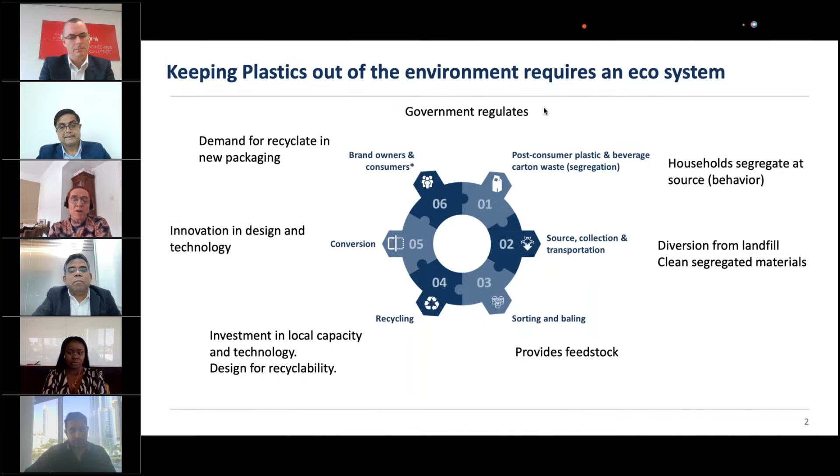So this is an ecosystem, and as you can see, it all starts with government regulation and enablers, which are absolutely crucial to keep plastics out of the environment. If we go to the next slide, please, Ben.

You'll see here, this is the landscape—specifically for the UAE, but I'll give you some input on the rest of the GCC as well. First of all, for a relatively small country, we generate quite a bit of waste. The majority is construction, demolition, and industrial waste, but we have about 6.5 million metric tons of municipal solid waste, and around 16% of that, about 1 million metric tons, is plastic materials.

Looking at that plastic component, by far the largest is LDPE, including flexibles, with a much smaller proportion of high density polyethylene, PP, and PET. Our per capita per day waste generation is about 68% higher than the global average—a GCC resident generates about 1.2 to 1.3 kilos of municipal solid waste per day versus a global average of about 0.74 kilos. So in general, we generate a huge amount of waste.

The plastic component of that waste can differ by country. In Bahrain, for example, it's estimated that almost 36% of what goes into municipal solid waste and into landfill is actually plastic—so quite a high generation, and a lot of secondary material available for recycling and conversion.

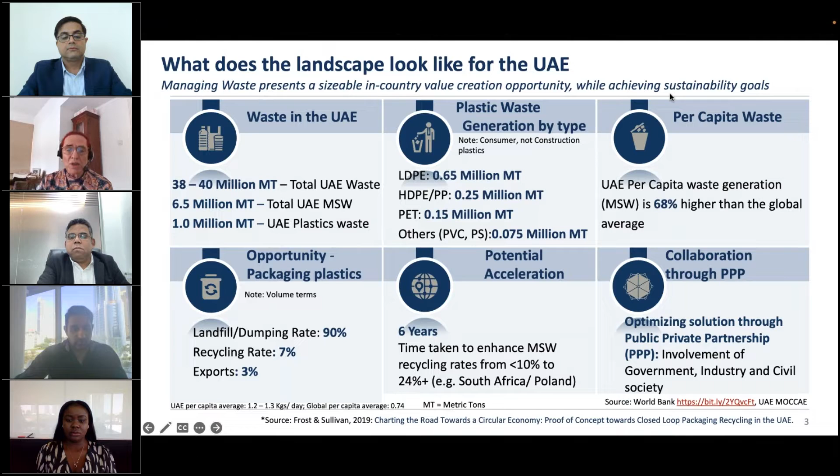Going to the next slide, one of the things undertaken was a proof of concept pilot in Abu Dhabi, where material was collected from private, clean segregated sources, as well as material from landfill. This was processed through a recycling facility in Al Ain. Then, through the operation of Industrium, our partners in the study, they did a plastic conversion. Using that material, they produced plastic pallets for logistics, water racks, water crates, etc., which were then purchased by the companies that participated in and funded the study.

So when we look at the core issues - and these will be very familiar to all the sectors sitting around the table today - the first thing, of course, is insufficient source segregation, and that's not only an infrastructure issue, it's also a behavior aspect. When we look at households in the UAE, about 15% express an interest and are committed to recycling. We call them eco-warriors - they're the ones who will go and put their materials into bins.

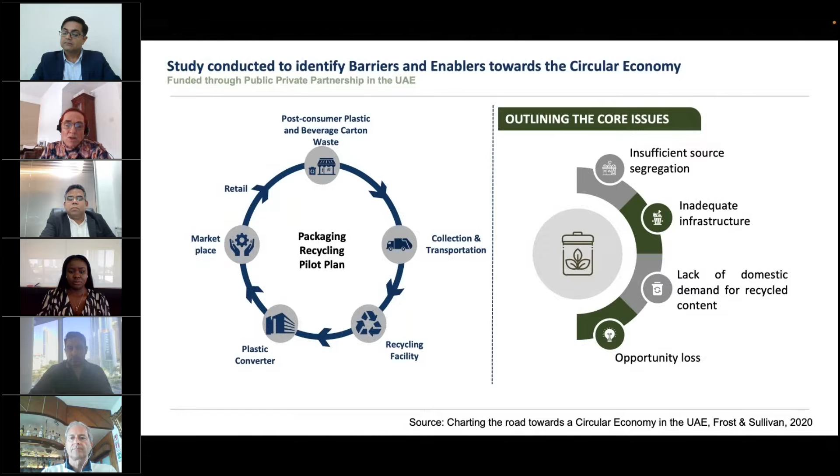They cover, for instance, the setting up of an extended producer responsibility scheme here in the UAE, the use of recycled content in the consumer goods sector - that's food grade recyclate - and things like mandates for segregation of source, national databases of materials so you know in terms of investment what the opportunity might be, and also the resource chain and management of material flows. So those 12 out of the 22 policies we recently adopted relate to our particular sector.

And I think it's fair to say that in Saudi Arabia, we have a similar public-private partnership with the Federation of Saudi Chambers that's now working with the National Center of Waste Management, also to define policies, conduct pilot schemes on recycling, and enable the whole circular economy for packaging. So this is really setting the scene.

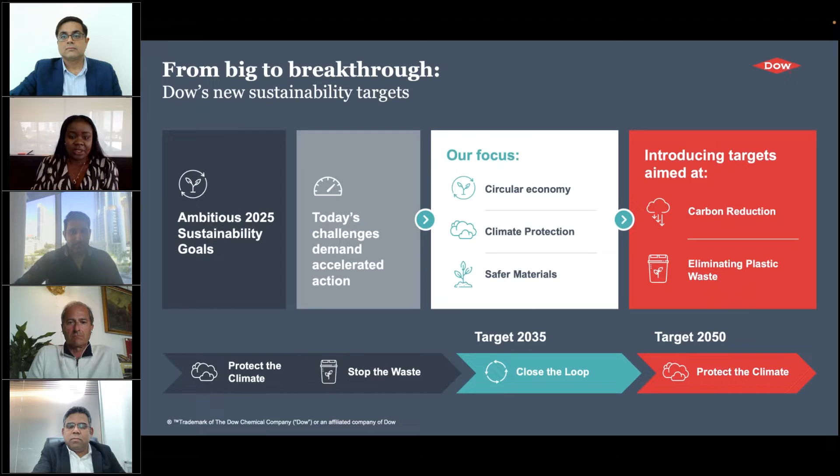Okay, so you see here that the perception of plastics recently, a lot of industries are really shifting to other alternative materials such as paper and others. So this can really work in other applications, but for flexible plastic, packaging plays a very key role. It has a longer shelf life, smaller carbon footprint, a better shelf appeal, amongst many others.

So it's really important that we as Dow have really committed to close the loop by 2035, which is really enabling 100% of our products which are sold into flexible packaging applications to be either reusable or recyclable. So then what I'll do now is just, we've discussed our sustainability targets, our sustainability goals. We are going to go a little bit further into the different pillars and the strategy that we really have put in place to ensure that these targets are being met.

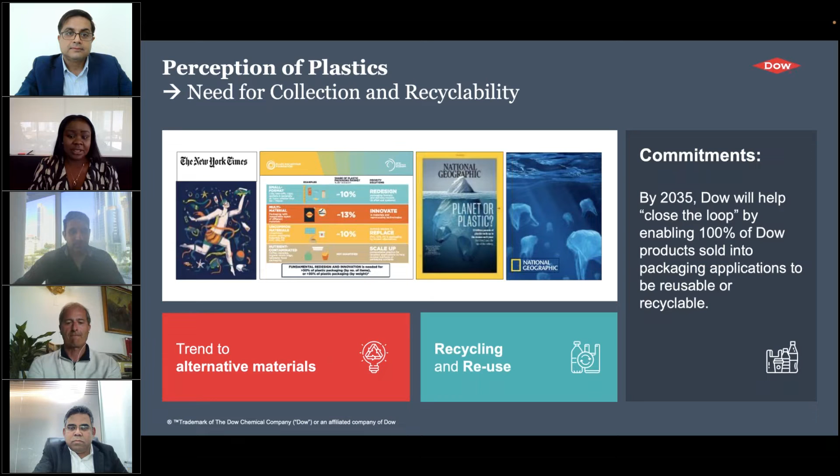Next slide, please. So you find here our strategy for ensuring that we're able to reach our targets. So we have here 5 main pillars. The first one is design for recyclability, which is a real enabler for circularity, not only mechanical recycling, but also chemical recycling as well. And with that is where I will let Hussein come to really further explain our product offering.

The second pillar that we have is mechanical recycling. And what we've done here is to really find partners to incentivize the collection of materials. And once the material is collected, our goal is to work with other partners to convert it mechanically into a recyclate. So the PCR that is produced will be used in non-food applications. For example, we currently have a couple of projects that we're working on in West Africa, and a couple in South Africa as well.

And then the third pillar is advanced recycling. So this is primarily a film that goes through a pyrolysis unit, which is like an oil production unit.

So basically you make oil out of the packaging, and that oil we clean up and take into the cracker to produce new virgin PE out of it, which from a quality perspective is also similar to virgin PE. And the fourth pillar is what we call the bio-based.

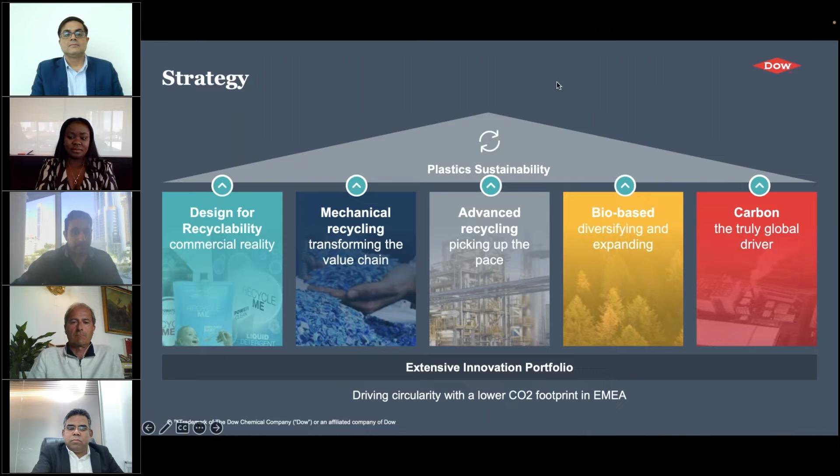So what you see here is a view of the integrated technologies that we have been working on lately, starting from trying to develop new resins that allow development of all-polyethylene films, to offering solutions for new production technologies, including the new different oriented film processes, and also the work to offer polyethylene-rich thermoforming films to support the polyamide substitution effort driven by some legislation in certain markets.

Also, we have been putting a lot of effort into working with our partners to develop new barrier solutions, develop recycle compatibilization resins in order to allow the ease of recycling for some of the conventional barrier packaging, and even partner with some of the packaging technology owners to develop know-how and process development to allow or even switch to design with rich polyethylene structures.

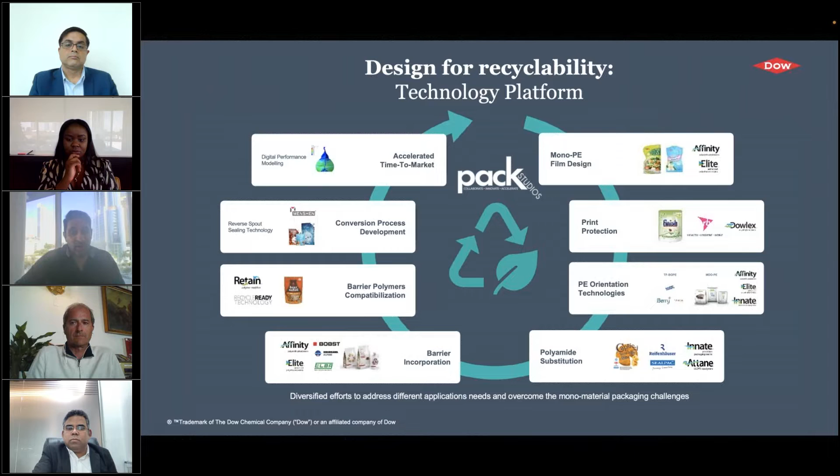That's all enabled with the support of our technology centers. So we have our global network of lab studio networks that allow us to take advantage of advanced film production, testing, and packaging line setups to accelerate the development cycles. Also, we use the latest modeling and simulation technologies in a way that helps us assess the impacts of design changes on performance, and bring additional reliability to the new solutions we have been developing with our partners. If we can please move to the next slide.

Okay, so the development between the different partners across the value chain is key. I'm referring here to a great success story to develop barrier MDO films with our esteemed partners engaged on this webinar. Within this technology, we're actually able to utilize the best brains at each site in order to come up with a solution that is extremely reliable and delivers remarkable performance.

From our side, we were participating in an attempt to develop the latest innovative MDO print solutions that can offer remarkable stiffness, maybe offer some sort of substitution to conventional PET films, but at the same time show higher thermal resistivity, a broad stretching window in order to meet the different MDO stretching requirements, and even offer the expected optics to maintain shelf appeal for the brand owners.

In addition, we were able to develop special solutions for the sealant web in order to make all-polyethylene structures that still have a unique toughness-stiffness balance, some ease of formability for different packaging line requirements, low seal initiation temperatures to meet even the most challenging sealing requirements for different products, including sealing through contamination, and also offer a good operating window on different packaging lines. So again, this is a very interesting success story, and a nice demonstration of the power of collaboration between different partners.

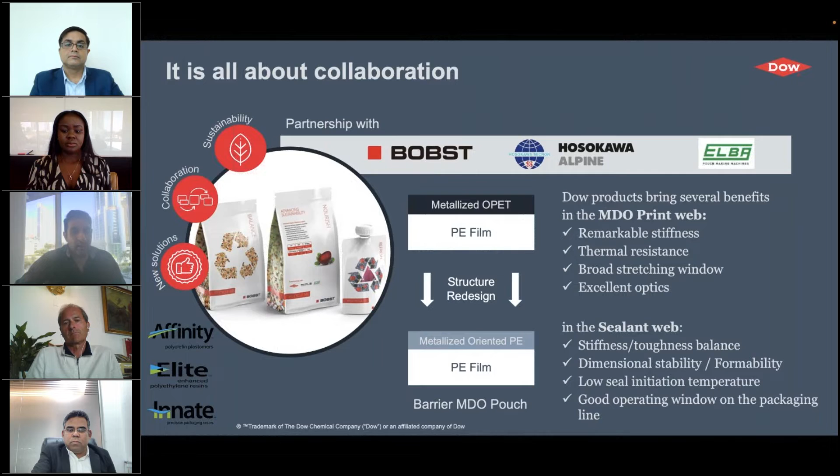If we can move again, please, to the next slide.

We believe that the metallization technology offered by BOBST could also be a great enabler when we come to rethinking the design of barrier films. We've been so proud of our two parties' collaboration, basically trying to develop and assess the performance of different film solutions, while we also tried from our side to utilize the best and most recent resin technologies in order to offer remarkable thermal resistivity, good elongation control during the metallization process, and improved metal particle adhesion to the polyethylene.

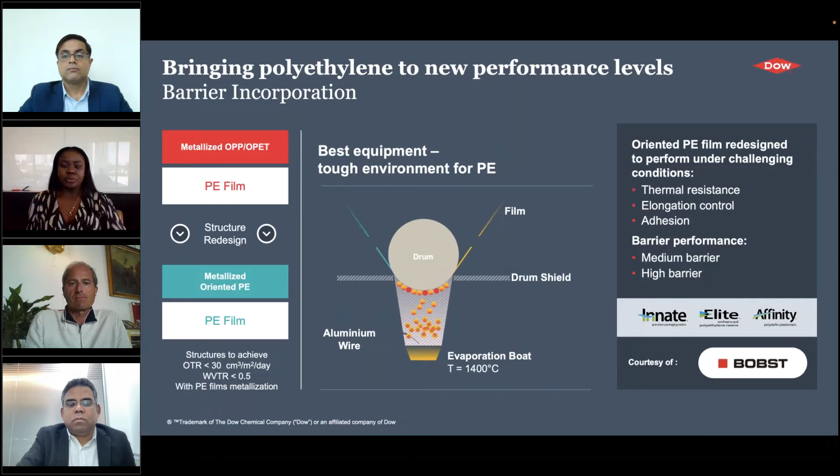We came up with a lot of different solutions that meet different needs with the use of our polyethylene resins, and we were able to cover a wide range of barrier requirements between medium barrier and high barrier within different structures. I'm expecting we will hear more from our partners here at BOBST team about what we were able to deliver together. Maybe if we can move further, please.

So again, we don't expect that we will see one solution that fits all the needs today in the market. That's why we've also been putting a lot of effort into working with different orientation film technologies in order to take current polyethylene solutions to the next level. Definitely the MDO today is the technology that has high attraction, mainly due to the ease of investment and the overall potential this technology can deliver.

And I think we were able, with the material science that we've been putting on the table... sorry, if you can go back, yeah, no problem. So we were able to develop solutions for different MDO setups, whether for the production of blocked films or non-blocked films, also different solutions and a wide range of products portfolio for blown film MDO requirements and also for cast MDO.

But also very recently, I think we've been taking our solution design for sealable MDO films to the next level, and I believe very soon you will start to hear a lot from the market about our latest resins introduced to produce sealable MDO. But again, we also need to understand that certain requirements might require different ways of thinking and maybe different technologies.

So on the other hand, we've also been working a lot with our partners in order to develop polyethylene-rich solutions for bi-oriented polyethylene films, basically for applications that really require a much higher, more challenging toughness-stiffness balance for pouches. Additionally, we've been working mainly with our partner in Europe, Kuhne, on the development of triple bubble technology.

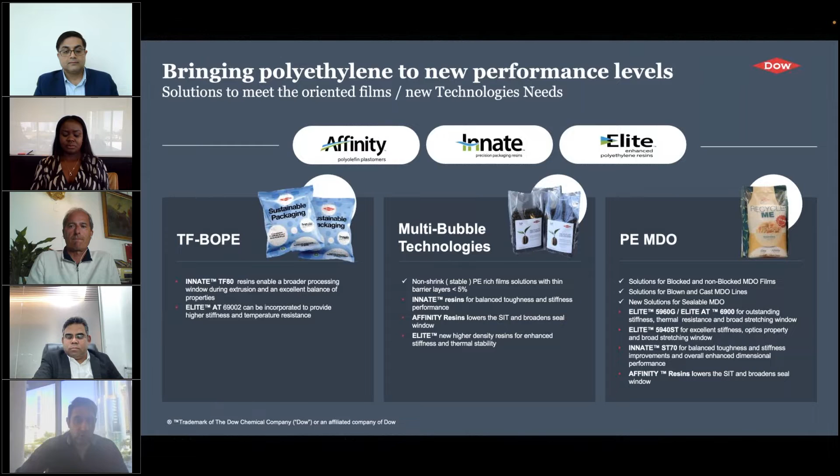So again, we try to diversify our efforts. We try to put the right focus and the best utilization of material science to make sure that we also support our partners in taking the best advantage of the latest processing technologies. So if we can please move to the next slide.

It's also important to emphasize the power of our compatibilizers portfolio. Within our compatibilizer products, we've always been able to help partners develop different solutions to enable recyclability of high barrier structures. Our collaboration with different partners, including a very famous brand owner and converter, allowed us to develop a fully recyclable solution using our RETAIN resin. The idea behind the compatibilizer in this case was to add it to the original barrier film structure to make the final film ready for recycling within conventional olefin recycle streams, without interrupting the quality of the recycle process or the final recycled material.

When we consider compatibilizers, we always have the flexibility to add them to the original films, during the recycling process, or even later when using barrier-rich recycled material granules during extrusion. That introduces a completely interesting aspect to the total solution we can think of when we talk about enabling recyclability.

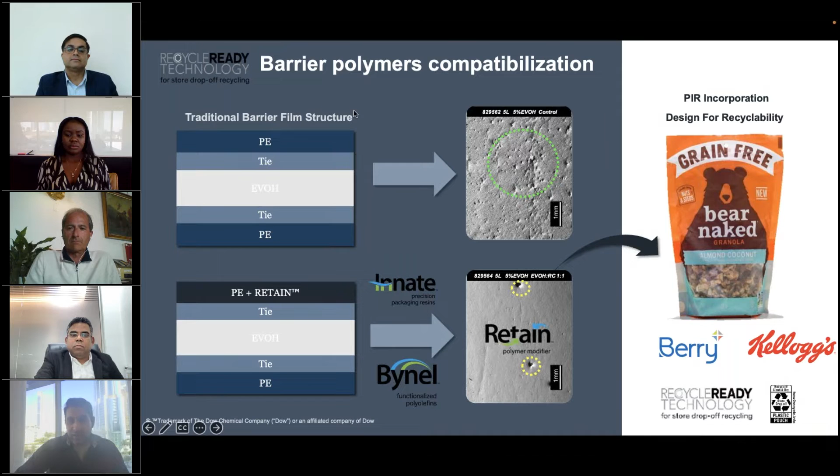If we can move to the last slide, please.

Finally, it's very difficult to cover all the details of the different solutions we've been working on, and what we've introduced under the umbrella of design for recyclability could be extremely intense when it comes to technical details. So for everyone engaged in this call, please feel free to reach out to your local Dow contacts or to the team engaged in this webinar if you're interested to understand more about your points of interest.

On a summary, we all should keep our belief in the value of flexible packaging. Today it has been a proven means of packaging that has helped preserve food resources, and has always been an efficient way of packaging, and has always come with a lower carbon dioxide footprint.

However, the future for sustainable packaging is also clear. We have been working to increase the value proposition of design for recyclability, focusing more on increasing work on monomaterial design, trying to reduce the complexity of certain laminated structures, and introducing new resins and new material science to enable packaging circularity, while making sure we don't jeopardize the functionality and performance of current products on the market.

Florian, are you getting the invite? Could you present? Yeah, or yes. Okay, great. Can you all see my screen now? Yes, we can. All right, so hi

Everybody, today we've learned in the further discussion that it's not only the material and the resins, but also the processing that is very important. And for this reason, I'd like to introduce our MDO technology from Hosokawa Alpine. Sorry, this is too far.

I want to start with a few words about our company. The company was founded in 1898 in Augsburg. We have 7 subsidiaries worldwide. At our company, around 820 people are working at the moment. The company, formerly known only as Alpine, was taken over in 1987 by a Hosokawa company from Japan. So that's where the name Hosokawa Alpine comes from.

We have a strong international orientation with around 80% export quota, and the revenue for our last fiscal year was 265 million, split up into 2 divisions: the powder and particle processing division, around 60% of the revenue, and the film extrusion division with 40% share.

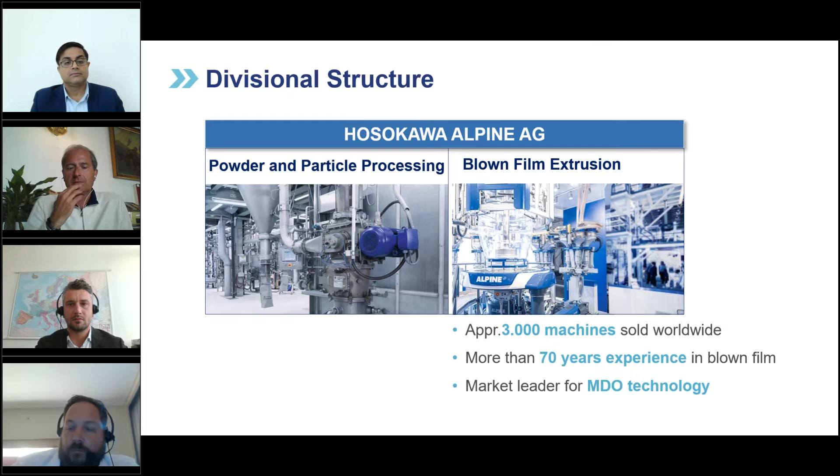To create sustainable solutions, especially for flexible packaging, it's mandatory to have the right technology for this. We have our MDO technology, which I want to tell you about. We have a very long experience with MDO technology so far. We started in 1997 with our first MDO system, and today we have our MDO 04V+. I will tell you a little bit more in detail later what V+ means.

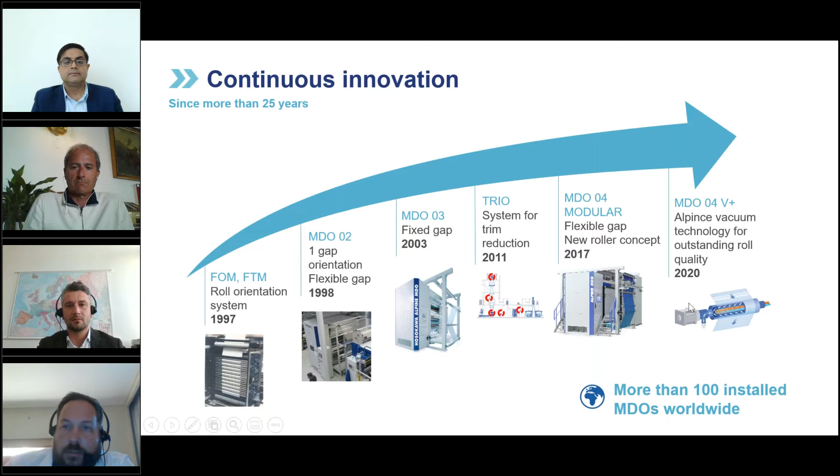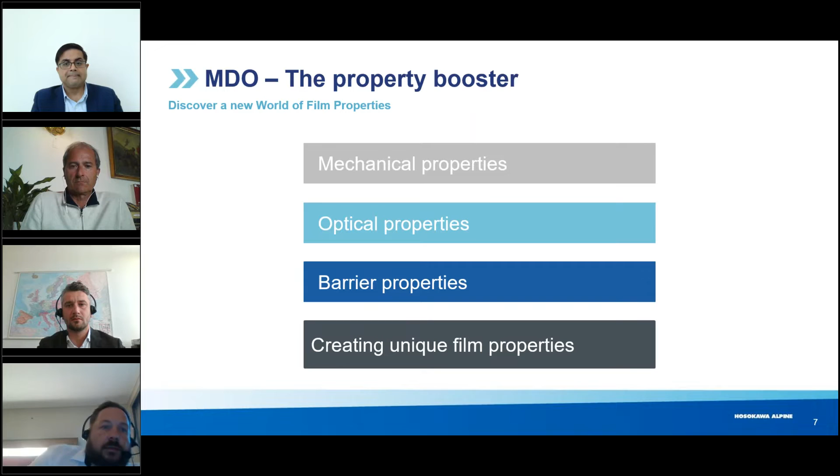So, what does an MDO do? It will enhance the mechanical properties of the film, like the tensile strength, the optical properties like the clarity, and most important, maybe for creating sustainable packaging, the barrier properties. This will help you in general to create unique film properties for packaging, for sustainable packaging solutions.

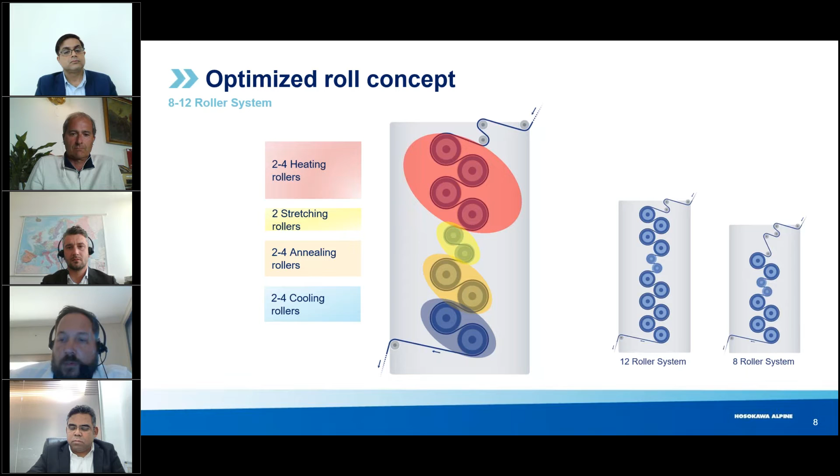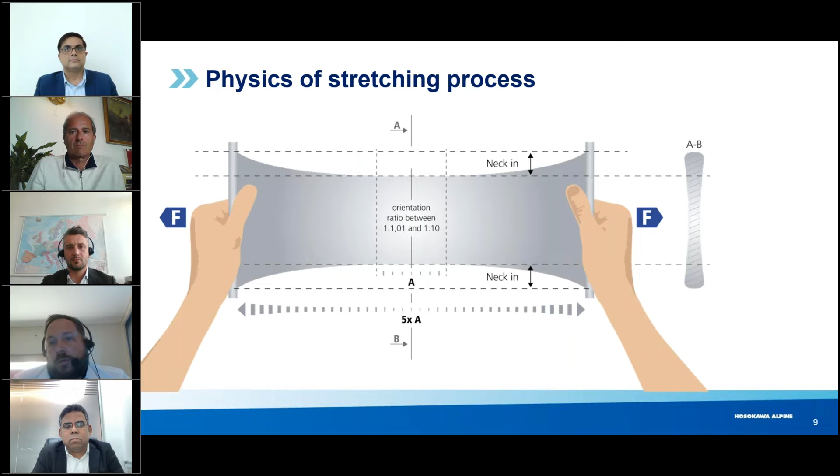What happens when you stretch the film? This will enhance the film properties in many good ways, but there are also 2 negative effects that happen. If you stretch the film, it tends to neck in, and on the side view you see there's a build-up at the edges of the film. This should be prevented because it will lead to more waste and not good flatness.

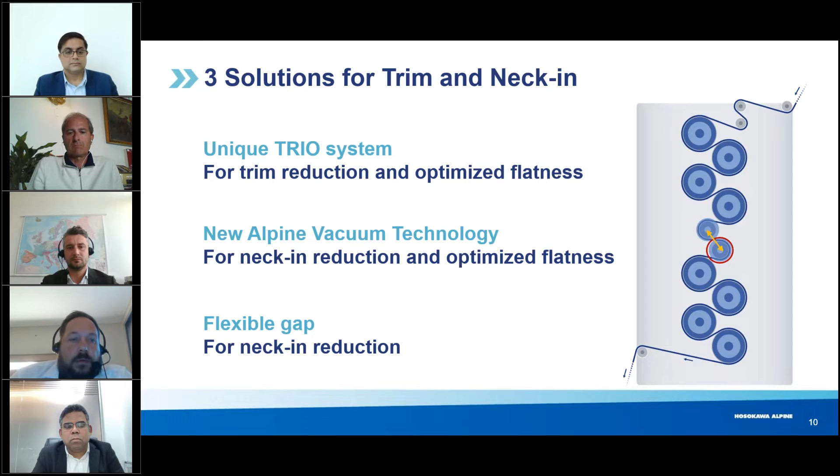But Alpine found 3 solutions for this. The first solution is our trio system. This helps you to reduce trim reduction and gives you optimized flatness for your film. The second one is the Alpine vacuum technology - this is also what is meant with V+ in our MDO. And we have the flexible gap.

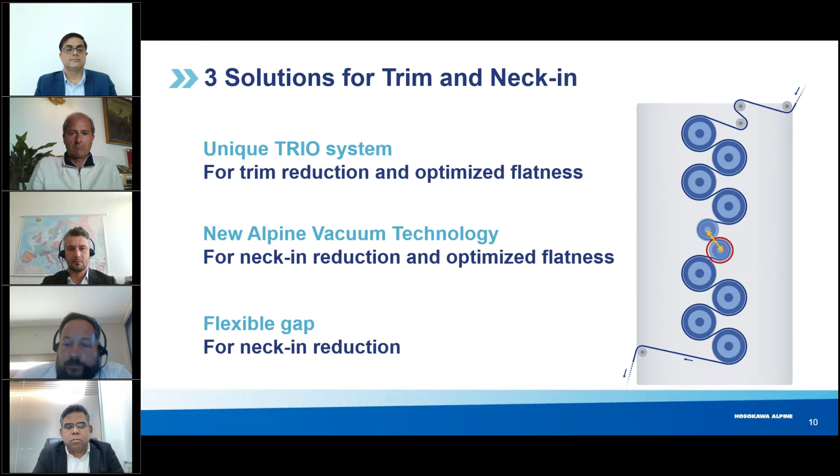This means this is mandatory to prevent the buildup at the edges later during the stretching process. The film is made on the bubble, at the film bubble, in these artificial areas made a little bit thinner. That helps to prevent the buildup, because there's less material in this area, and the buildup will still happen, but will be compensated because of the thinner areas.

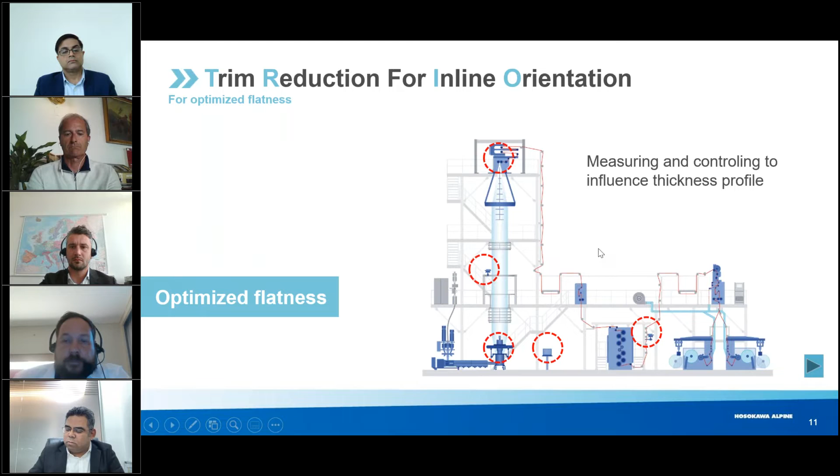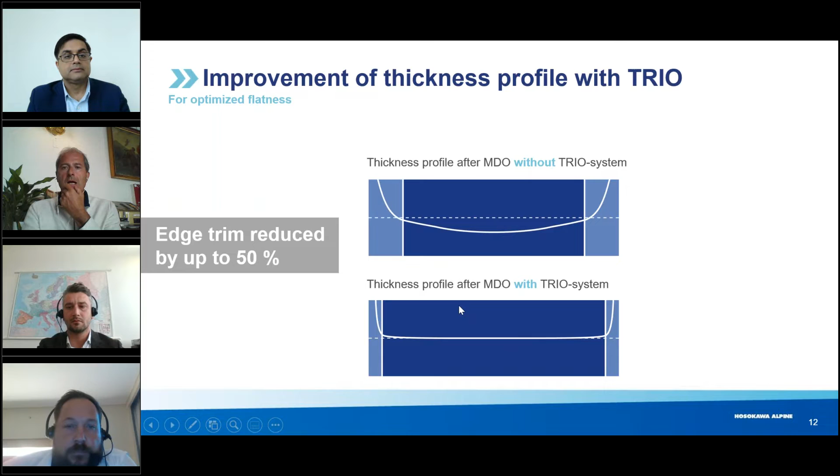If we use our trio system, then you have a flat and even film profile with less trim wastage. The second thing is our vacuum technology.

That means that the second stretching roller is a microporous roller where a strong vacuum is applied. This leads to the film being sucked very tight on the roller, and the necking is prevented.

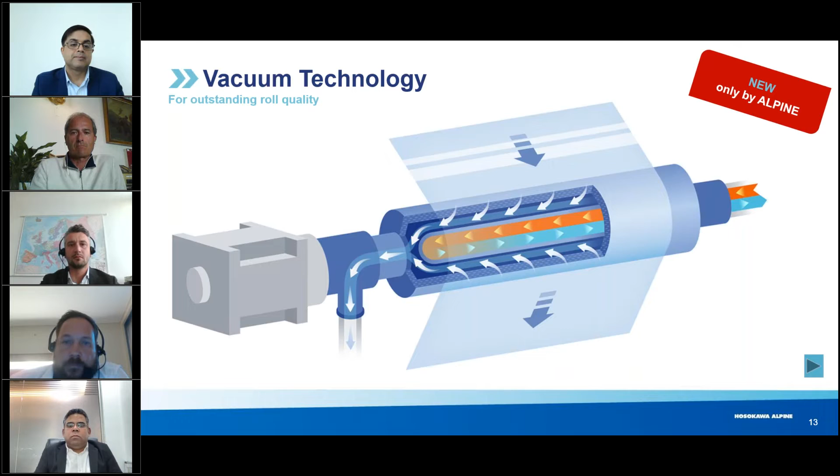This will also help to create a better film flatness and also to prevent web breaks during the stretching process. Preventing the neck-in will lead to a lower trim wastage. The vacuum roller will help you to get the best roll cylindricity and the maximum process stability because of the prevention of web breaks, and this will lead to the best flatness.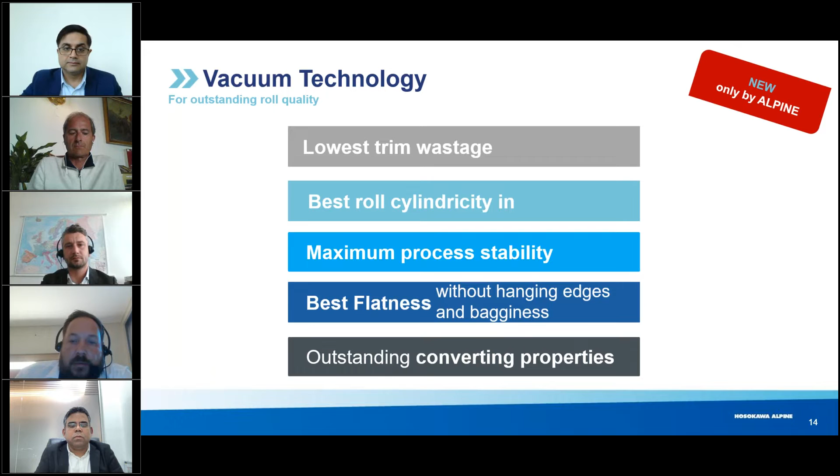What is very important for the converting of the film, for example, like we've heard before, for metallizing. This will lead to outstanding converting properties and is mandatory to produce a sustainable packaging solution.

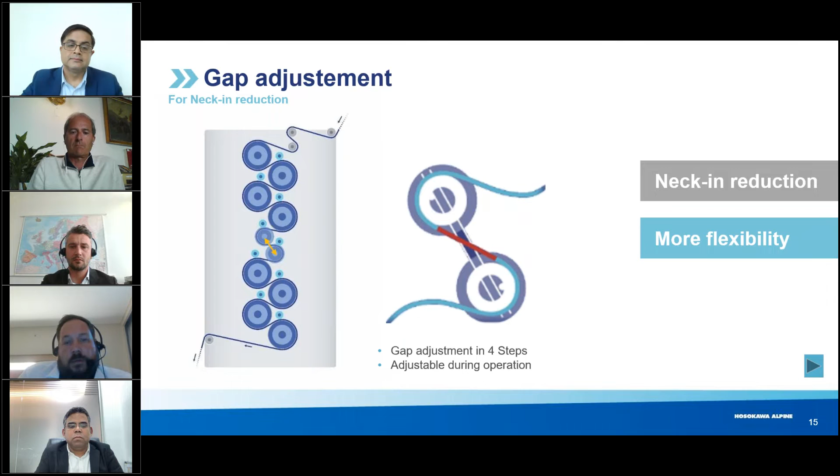So the third thing is our flexible gap. The gap is between the two stretching rollers. It's adjustable in several steps, four steps, and it's adjustable during operation.

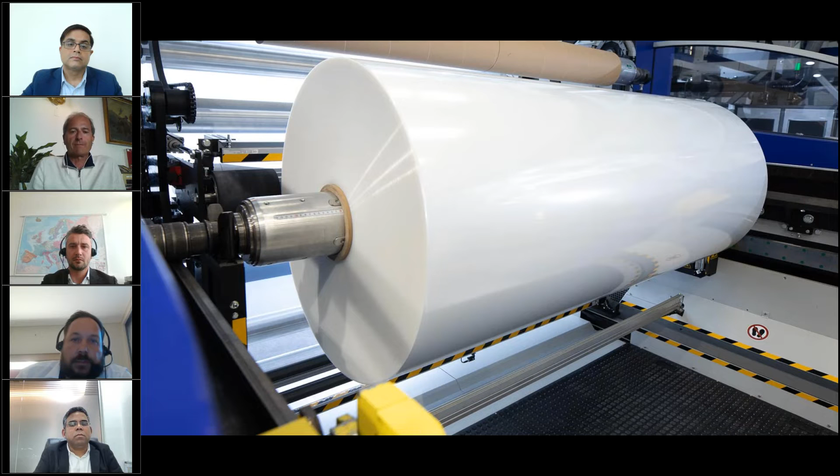This is like a typical MDO roll looks like. You can see a good roll cylindricity, perfect flat film.

Two ways for inline production are possible. The first way is the blocked film production, which leads to a high film thickness, and only symmetrical film could be produced. The second way is the double flat film production, which is more cost efficient and also allows producing asymmetrical film structures.

And for sure, as you may know, the film should be thinner. This is also an advantage of the double flat, because with a blocked film structure, you will always have a thicker film.

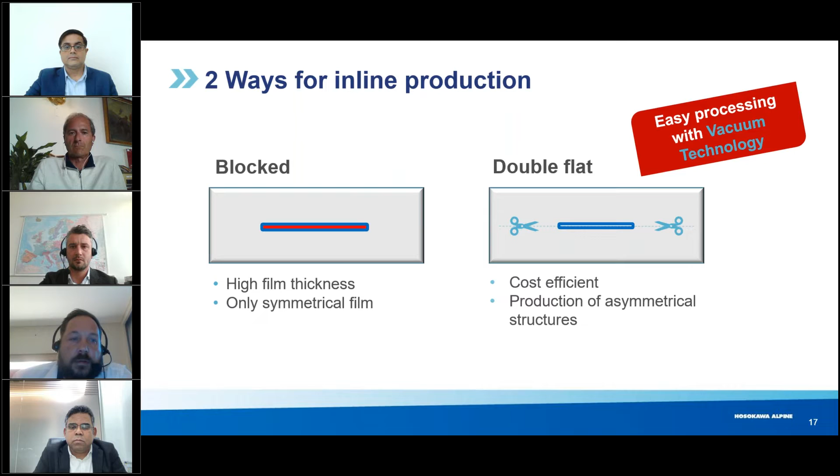Our MDO is available in several widths between 1.6 and 3 meters. The film speed at the inlet could be up to 130 meters per minute, and the outlet could be up to 300 meters per minute. The stretching ratio mechanically is possible 1 to 10, but for PE films, we say in general 1 to 5 is the most common stretching ratio.

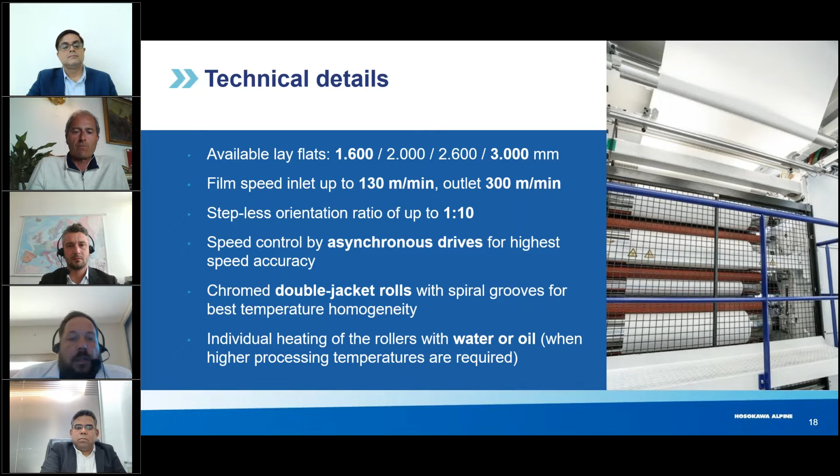The rollers can be controlled asynchronously for highest speed accuracy, and the MDO rollers are chromed double jacket rolls with spiral grooves for the best temperature homogeneity. Individual heating of each roller is possible, or it's standard. You can choose between water or oil.

This is like an installation could look like of an MDO system. Here you can see the blown film line on the right side. Then there is a secondary nip for the MDO. The film goes through the MDO on the third nip and on the winders.

Also possible is to bypass the MDO, just bypass the second nip and go directly to the third nip, direct to the winders. So you can produce MDO films and also lamination films with the same line. Or even if you have some downtime with our line, maybe for maintenance, you can use only the MDO to do some trials.

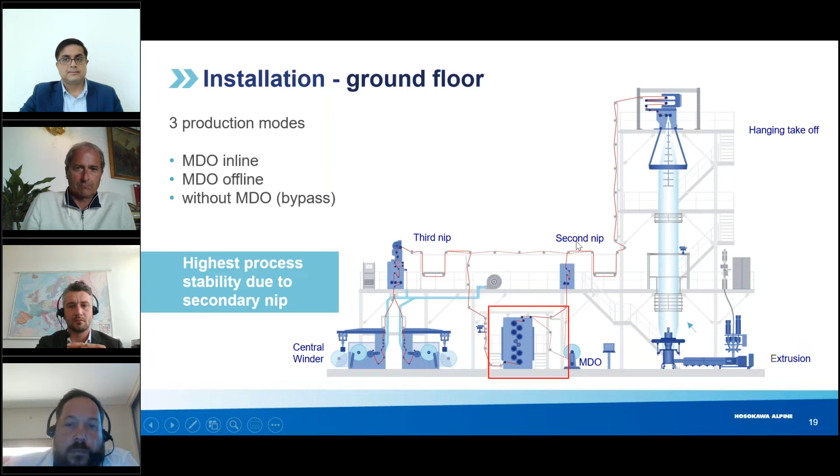Also possible is the installation of the MDO at the first floor, and this leads to a slightly different installation, but it's quite similar. This is maybe recommended if you don't have that much floor space, or any other reasons.

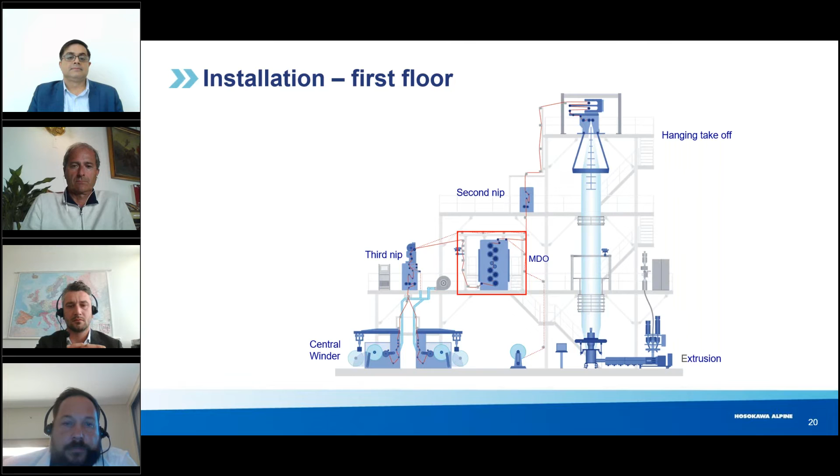Why choose Hosokawa Alpine? We have the longest experience for MDO technology. We have our unique trio system and our vacuum technology for best MDO quality. We have more than 100 MDO lines installed worldwide. We have a very high level of knowledge, and we have a very good customer support, also for beginners in the MDO process.

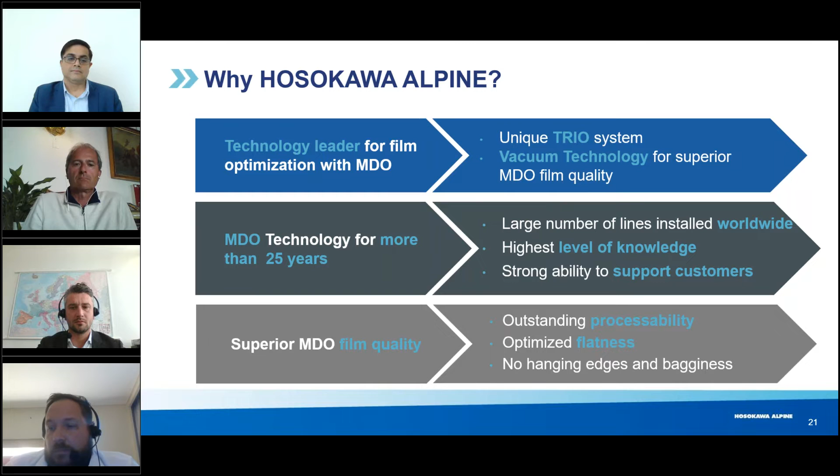MDO creates superior film quality for outstanding processability, for the optimal flatness and no hanging edges and bagginess, what is mandatory for good converting. So that's from my side. Later, my colleague Konstantin will answer your questions. Thank you.

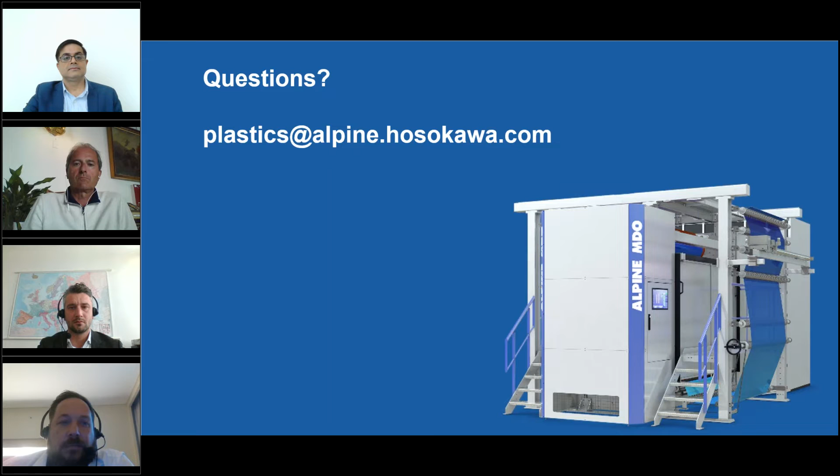Thank you, Florian, for taking us through how the MDO films are made and what are the special features which allow you to produce better quality MDO material. Now we move on to Bobst, which will share with us the process of barrier enhancement, printing, coating, and lamination, which transforms the extruded monomaterial films into vibrant branded materials. With their unique product mix, they are in the ideal position to assist us in delivering monomaterial laminates of the future, which, whilst closing the loop, make transitions to the new age structures a seamless experience for all.

So what we have been focusing on ourselves as Bobst, and you will see with Nick, we identified clearly from the beginning that we had the barrier solution, and we are now able to offer solutions for high or ultra high barrier for full PE or full PP monomaterial laminates. It took us many years, us and all our ecosystem, and we have also been working in parallel on fiber paper solutions for food applications, high barrier. You will see it's amazing, as well as different approaches like RPP or even home compostable PLA, and so on. Every month, every 3 months, there are requests for highly innovative solutions, either recyclable, compostable, or biodegradable.

And collaboration, as I said, is key, because from Bobst our strength is really the recyclable barrier. You will hear from Nick. And the additional added value you need to bring on the laminates, like pre-coating, top coating, you need to laminate. Lamination now needs to bring also additional barrier to reach the level of high barrier or ultra barrier we need. And also the print needs to bring the sustainability we're looking for, for example water-based printing, for highly optimized processes like extended color gamut. So here what is really key is that when you move into this kind of solution, you need to find collaborations, partners like Bobst and the ecosystem, because you save years of R&D. Everyone can work on it, but it takes years to develop this kind of solution that Nick is going to present. And this is the contribution of a key industry player like us to this process.

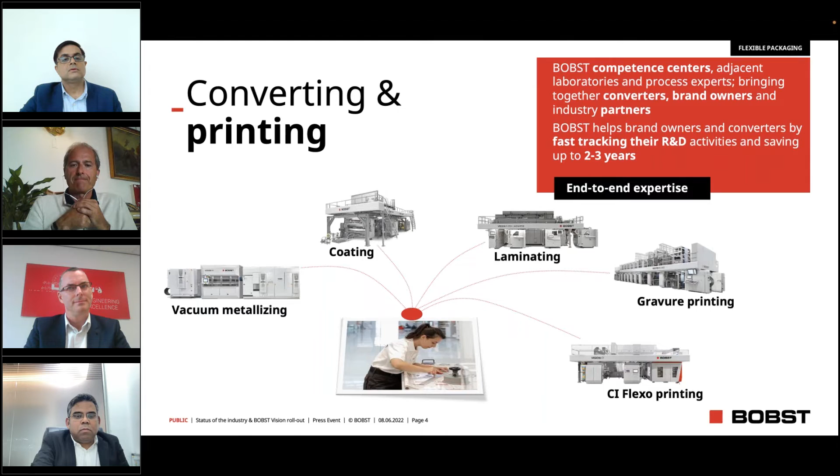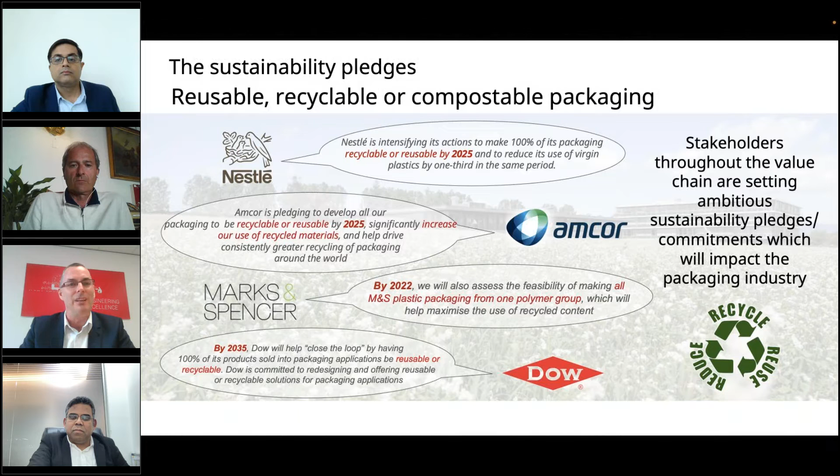So when looking at the global market trends and the current developments for sustainable flexible packaging, you can generally group the trends into what we call the 3 pillars of sustainability. Namely, the first one is monomaterial, which is polymer-based solutions, where the main market driver is to use polyolefin, polyprop, or PE solutions based on a single polymer family to enable improved recyclability. The second pillar of sustainability is what we call compostable, biodegradable, or bio-based solutions, where again the real trend or ambition in the market is to find home compostable solutions to avoid the need for consumer collection and sorting, or marine degradable to prevent ocean plastic pollution. Finally, the third pillar is based again on monomaterial, but this time is based on fiber or paper-based flexible packaging structures, and this is again to really enable recyclability.

The largest market volume for flexible packaging will be based on monomaterial, polymer-based recyclable structures. Currently, polyethylene seems to be the preferred material of choice as the collection, sorting, and recycling infrastructure is more developed. Next slide, Ben.

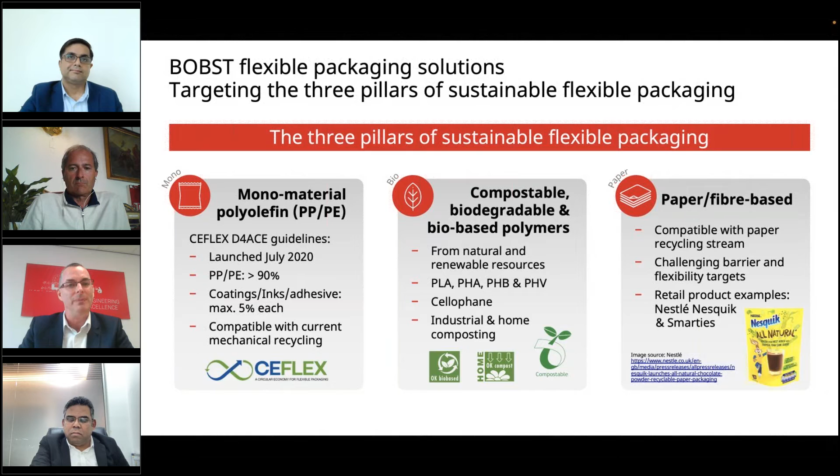In terms of the barrier requirement, for higher barrier applications, the market requirement generally falls into 2 main barrier levels. The first one is what we call metallized polyester replacement, where the market requirement is to achieve an oxygen and water permeation rate of less than 1 cubic centimeter per meter squared per day and 1 gram per meter squared per day, respectively. Then we've got a second target, which is what we call ultra high barrier, which is to replace aluminium foil for flexible packaging, where the requirement is to achieve an oxygen and water permeation rate of less than 0.1 and 0.1 respectively. Next slide, Ben.

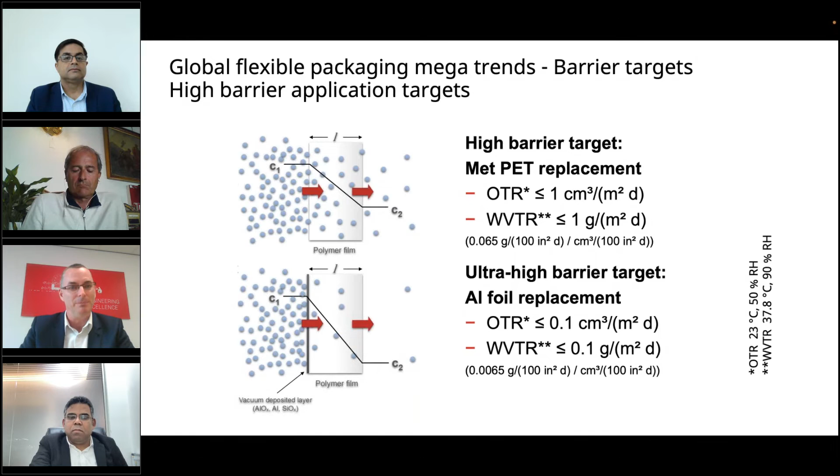So let's have a look now at the challenges we faced when developing the one barrier solution through the different process steps. Next slide, Ben.

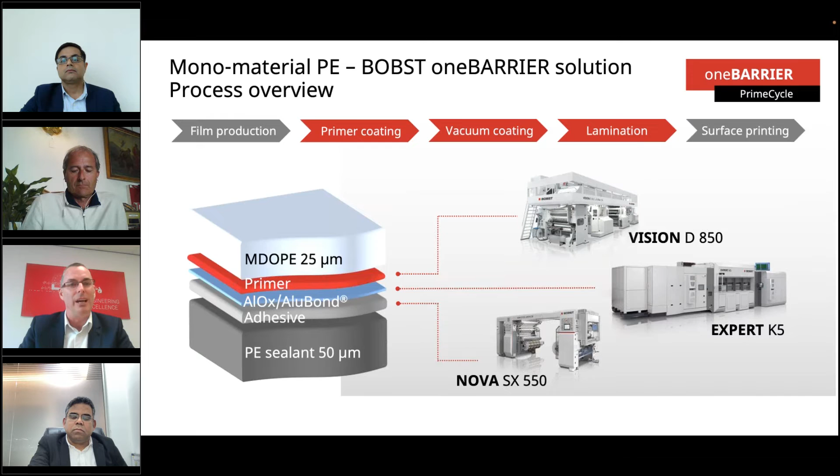We start first with a primer coating that we apply onto the MDO-PE based film. Firstly, we have a challenge with surface polarity based upon the non-polar nature of the MDO-PE. We need to make sure the primer adheres very well to the film surface, which was achieved via optimized treatment on the film line, on the coating line, prior to applying the primer coating.

The next challenge then was about the primer chemistry. We had to test several different primer chemistries to achieve the best surface chemistry and polarity that gave us a favorable surface for good, what we call nucleation and growth of the subsequent vacuum deposited layer.

The next challenge then was application technology. Once we've identified the optimum primer type and the chemistry, we needed to apply these to achieve a good coating laydown with a uniform and closed layer. Finally, for web handling, although the mechanical properties are improved with MDO technology, web handling is still important with regards to tension settings and also the drying profile on the coating line. Next slide, Ben.

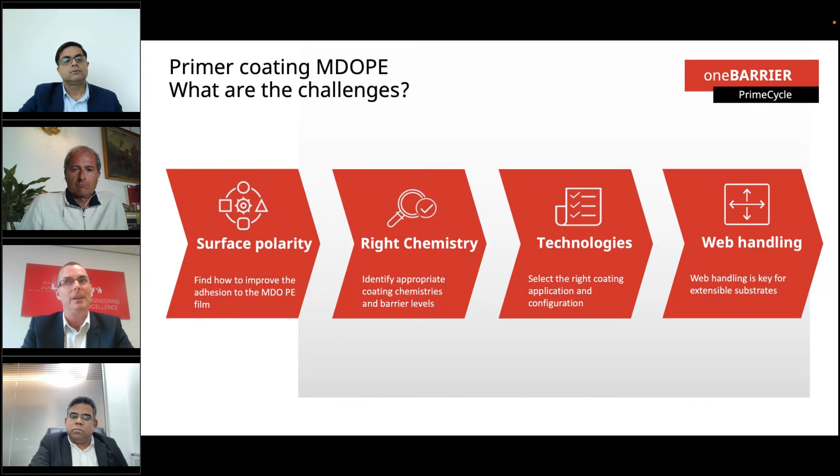We then move on to the metallization step of the structure. Metallization on PE-based substrate is normally very challenging, as they're typically heat sensitive, extensible, and non-polar in nature. MDO technology and primer application have certainly helped improve some of the issues related to extensibility and surface polarity. However, we still have challenges processing the primer-coated MDO-PE in a metallizer, and we needed to develop solutions based upon heat load management, web handling and tension control, and inline vacuum plasma treatment to prepare the film before vacuum metallization inside the vacuum coater.

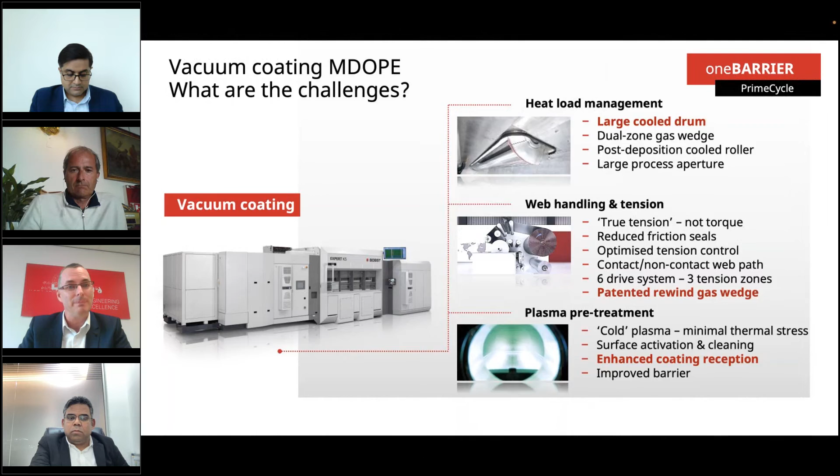So let's now look at the full performance of the one barrier duplex solution. If we start with the transparent alloy structure and look at the performance through all conversion steps, we start with the MDO-PE film that has an oxygen barrier of around 4,100 centimeters cubed per meter squared per day and a water barrier of 6 grams per meter squared per day. With the application of the primer, very thin, we enhance the OTR to a level of around 12 cc's with no real improvement on WVTR.

We then add the transparent Alox barrier layer, which further enhances the OTR to about 0.4 cc's and the water barrier to around 2.2. Finally, with the aid of a barrier adhesive and lamination to a 75 micron special sealant web, we have an OTR of around 0.1 and a water barrier of 0.5. We also assessed the laminate bond strength of this duplex laminate, and found an average bond strength of around 3.4 newtons per 15 millimeter.

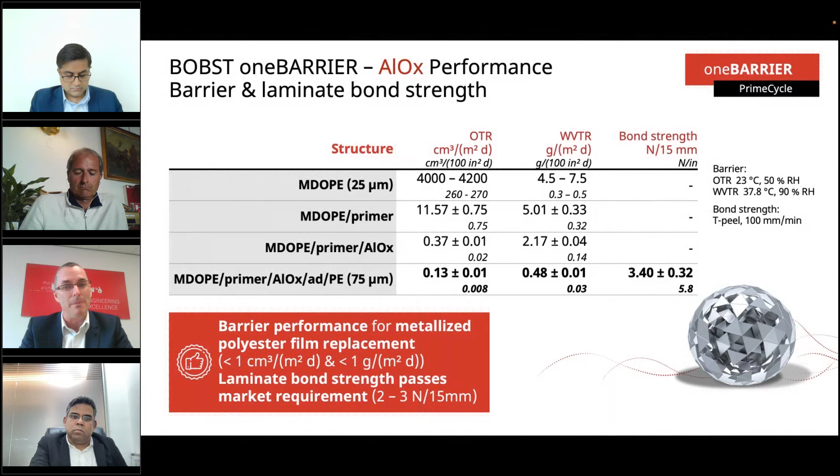In summary, we can conclude that our transparent one barrier MDO-PE structure has obtained barrier performance equivalent to metallized polyester film, and we also satisfy the market requirement in terms of laminate bond strength. Next slide, Ben.

If we now take a look at the opaque, shiny Alubond metallized solution, again looking at performance through all conversion steps, we have the same base film, but in this case we use a different metal receptive primer for the Alubond. With the primer, we enhance the OTR to around 5 cc's, again with no improvement in WVTR.

With opaque Alubond metallization, we enhance the OTR to a level of about 0.7 cc's and the water barrier to 0.1 grams. Finally, with the same barrier adhesive and lamination to a very special 75 micron sealant web, we take the OTR to levels below 0.1 and the water to levels below 0.1, with a laminate bond strength of around 3.6 newtons per 15 millimeter.

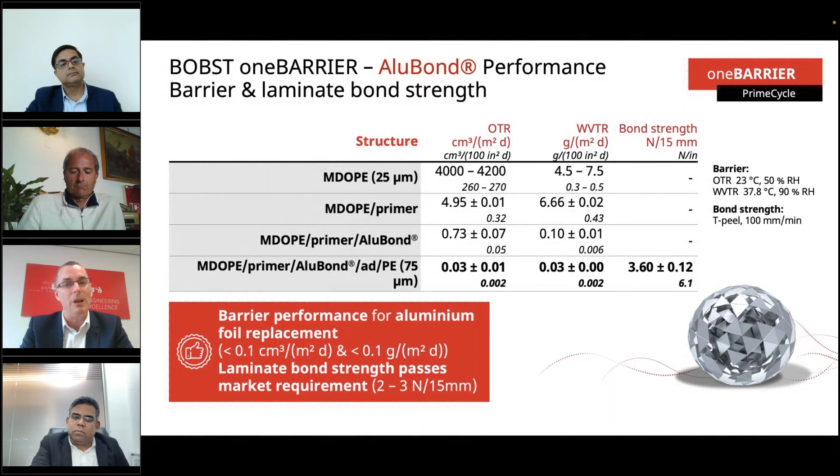So in summary, again, we can conclude with our opaque metallized one barrier MDOPE structure, we've obtained a barrier performance equivalent to aluminium foil, and we also satisfy the market requirements for the laminate bond strength. Next slide, Ben.

To help illustrate the potential recyclability of the solution via the amount of monomaterial in the one barrier structure, in this case we've used a 25 micron MDO-PE film, and the sealant web is based upon a 75 micron PE sealant web. Using the mass balance of the polyethylene, we have a monomaterial weight percent of around 98% in the case of the non-printed structure, or 93% in the case of the surface printed solution. So in both cases, we are greater than the 90% CEFLEX guidelines, even for this relatively thin duplex structure.

We're proud to say we've obtained this recyclability certification via the Institute of Cyclos HTP in Germany, where for the non-printed one barrier prime cycle solution, together with the Alox transparent vacuum layer, we achieved a recyclability level of 98%, which is one of the highest in the market for a high barrier structure. Next slide, Ben.

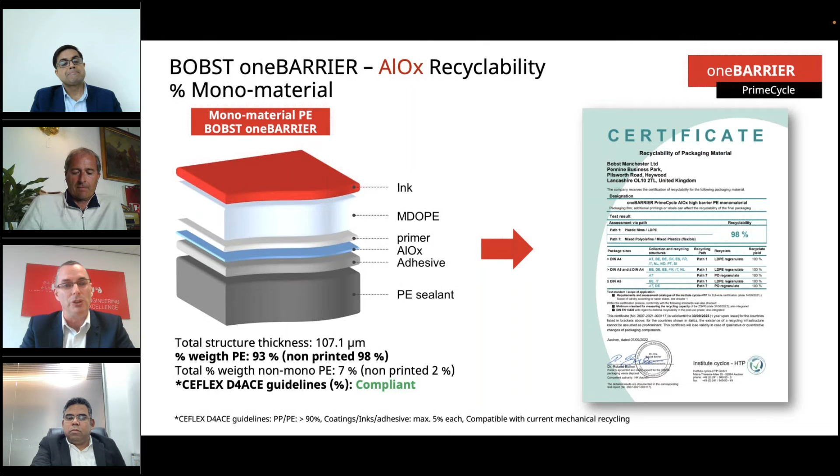To conclude the presentation, I would like to summarize the main advantages behind the one barrier prime cycle full PE solution. In summary, it's a standardized high barrier solution with an extremely high percentage of polyethylene. It can be used as a pre-made high barrier laminate structure, which can then be last minute tailored with the relevant surface print technology. This gives flexibility regarding the print technology used, so we can think about long run gravure, medium run flexo, or very short tailored run digital print.

By removing the ink layer from the embedded structure, it's also helped Bobst and our partners really maximize the barrier performance of the packaging structure. Additionally, any limitation on laminate bond strength related to the embedded ink layer has now been removed, so we can get higher laminate bond strengths, which is key for these sustainable solutions.

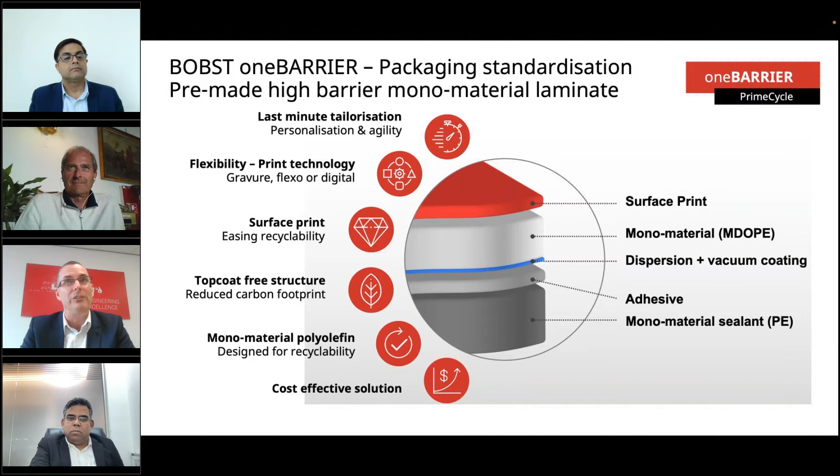So after this thorough technology review that we've had, we would like to now look at success stories from the region on sustainability, along with perspectives from a regional brand owner and a converter.

We have amongst us a very well-known figure, Kunain Shahidi from Almarai. He's a strategic thinker with over 20 years of experience in packaging development and procurement. He holds a postgraduate degree in packaging technology from the Indian Institute of Packaging, India. His additional achievements include recognition by the Institute of Packaging Professionals, IOPP, as a certified packaging professional from the USA, and Associate of the Institute of Packaging, UK. Kunain is currently employed with Almarai Company as a senior manager based in Sharjah, UAE.

Besides Kunain, we're also going to have Dharmesh Zaveri, who is General Manager of Flexible Packaging and Cartons for Hotpack Global, based out of UAE. Dharmesh has been in this industry for over two decades, and he is also leading the sustainability agenda for the company.